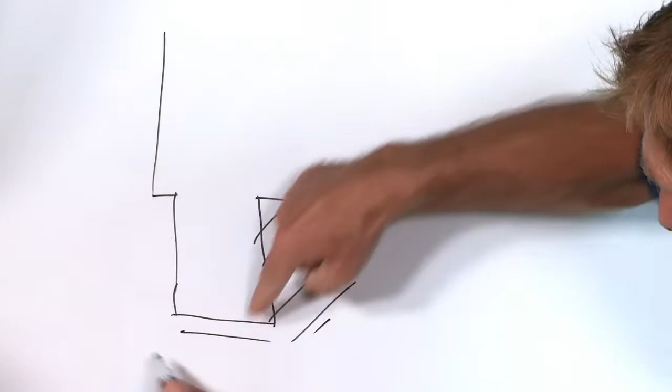So backer rod comes in sizes from 1/4 inch up to 4-inch backer rod, which is kind of crazy. Well, that's a gap. But if you have a big gap, say in a window frame that's deep, so this is the gap. This is the area you're going to caulk. So you've got expansion and contraction occurring across this plane here in this gap. Yep. You're going to fill this with caulk.

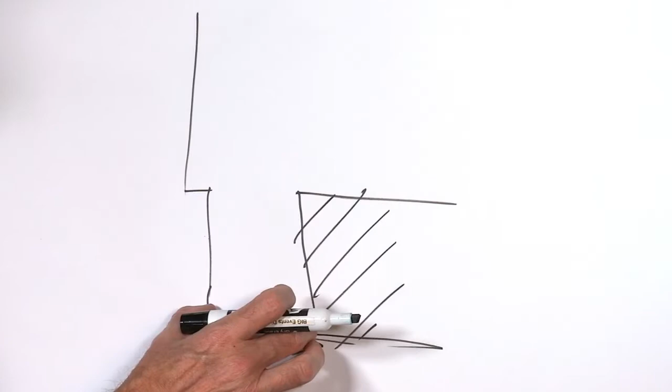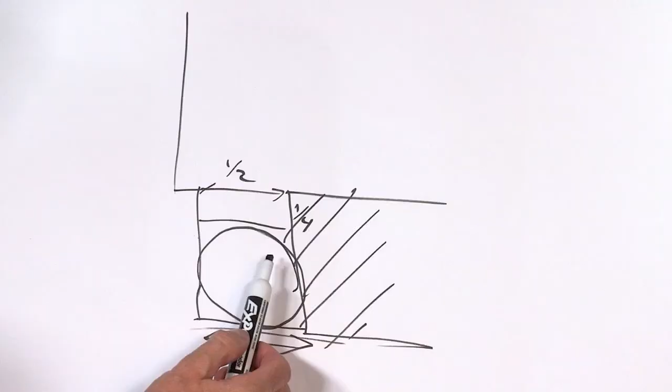You shouldn't have caulking more than twice the width times the depth. In other words, if this is 1/2 inch here, the depth of it should be 1/4. It should always be twice as wide as it is deep. You put the backer rod in here. You control where the caulk is going. You use a lot less caulk. You also break the bottom of the seal with this surface down here. This backer rod should go in 1/4 or 25% wider than the gap that you're filling with caulk.

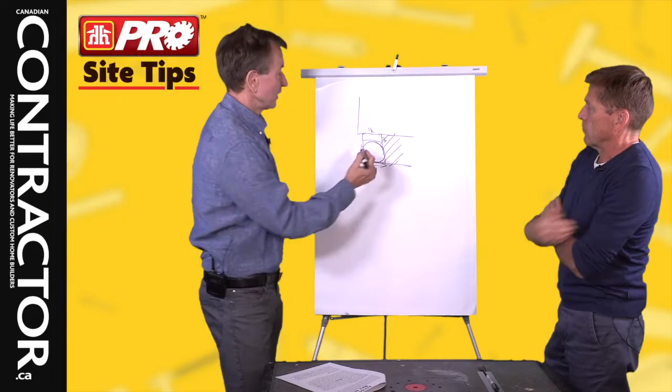So you mean if the backer rod is 1/2 inch, then the gap that you have should be 1/4 inch less than that in order to fit it properly? So if this is a 1/2 inch gap, you don't want your caulk going down more than 1/4 inch. A lot of people will just jam the caulk down there and fill this in. There's a whole bunch of reasons why that's bad, but in order for this caulking surface to expand and contract, it needs to be skinnier like this. If it gets deep, it's not going to work. And it's wasting material as well.

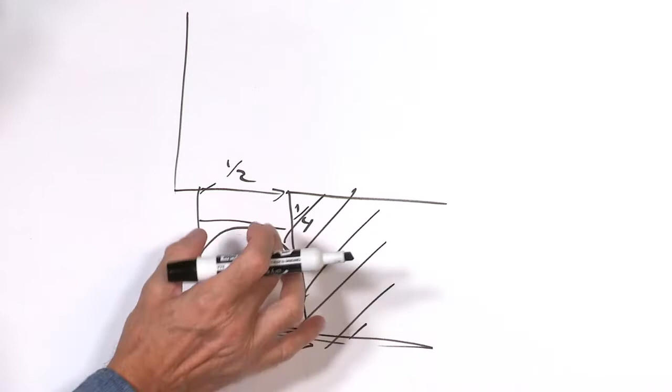So that's backer rod. Now you said there was something else we needed to be mindful of when it came to caulking in between hard surfaces in the cold. So imagine this is a siding issue, it could be a window frame or door frame issue. You have 3 different pieces of material, 1, 2, and 3. Does it matter what kind of materials they are? Could be wood, could be metal, could be stone, really any kind of material. You do not want to caulk this crack all the way down so you have a 3-surface bond with the caulk. Polyurethane caulk will expand and contract nicely, but not if it's adhered to this bottom surface, or what I'd say the fixed surface.

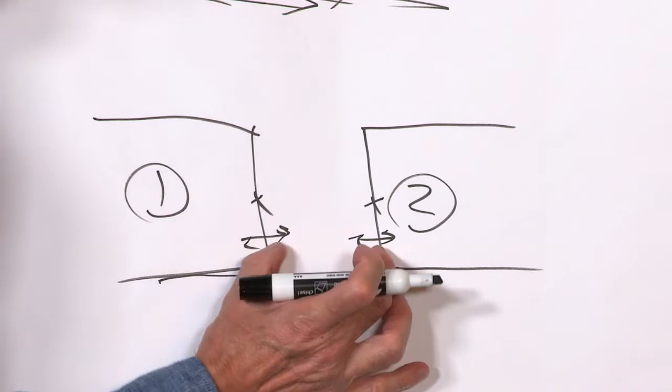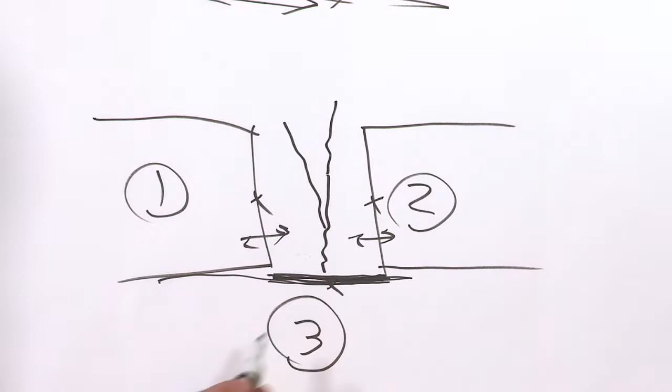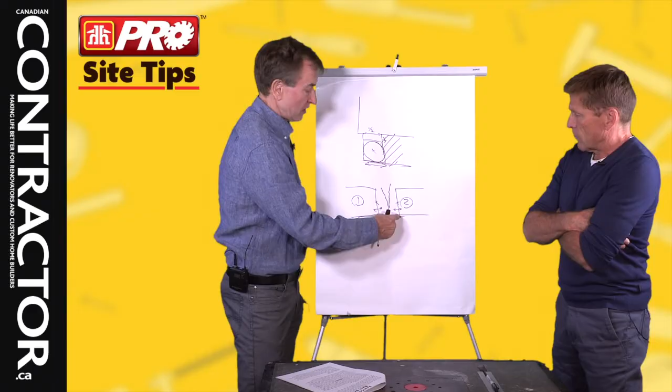Because you can imagine as this piece goes back and forth, this should be free, almost like slippery, so that the caulk can expand and contract. Otherwise, it'll get hung up on here. It'll get fixed to the surface, and when it expands, it can rip. It can fray, it can break up. So this is a bond breaker. So with bond breaker tape, you're going to put it down at the bottom of the crevice or the hole, and make sure that that is there.

So really, the bonding that you get from the caulking can only be on 2 surfaces, and those surfaces move back and forth. You want it to stretch like a little rubber band in between the 2, and you can't have that rubber band stuck to something else. So you don't caulk 3 different surfaces in a 3-surface bond. You only want the adhesion of the caulk to here and here. You want this to be free.

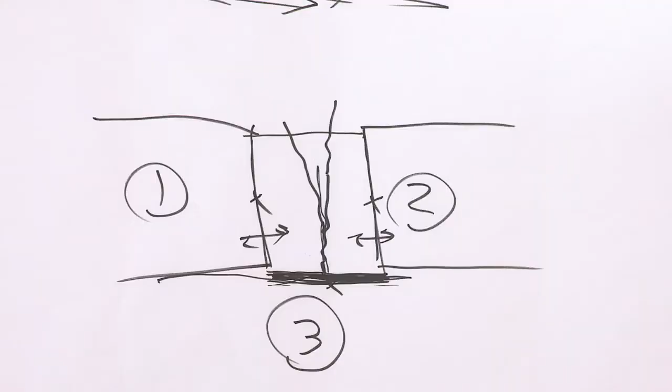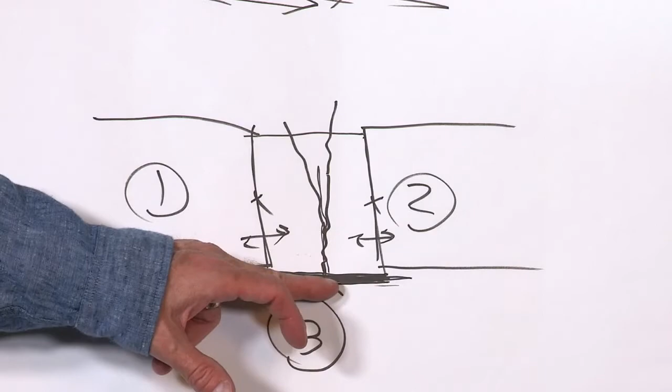How many contractors use bond breaker tape? It's a different tape from painter's tape or masking tape. It's called bond breaker tape. And the extremities that even great polyurethane caulk has to go through mean you want to use bond breaker tape to make sure that you're not doing a callback or have a product failure. Caulking doesn't usually fail because of the materials. The materials are so good; they fail because they weren't installed properly. So you want backer rods and bond breaker tape.